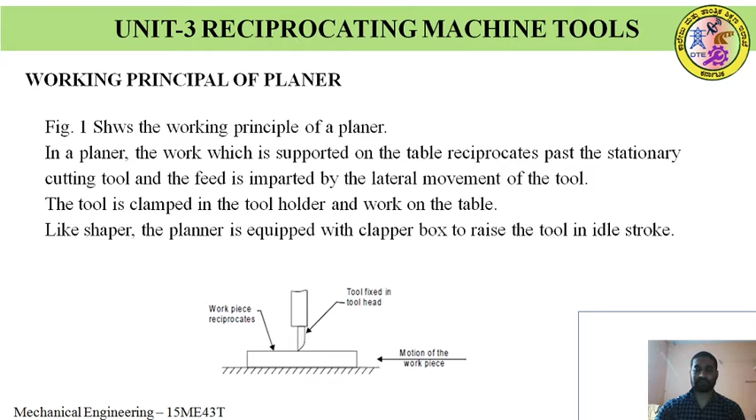The working of the double housing planer: the most common type of planer used in the market is the double housing planer. It is used to machine large castings like lathe bedways. The length of the lathe bedway is too large, along with the guideways of the lathe, and this planer is used for machining such parts.

This planer has a heavy and long bed, usually 2 to 2.5 times the length of the table, in order to accommodate the total length of the stroke. It is 2 to 2.5 times the length of the table, and it is provided with two guideways upon which the table reciprocates.

It carries the workpiece. There are two vertical housings, called columns, mounted near the middle of the bed, exactly in the middle. These two vertical housings, also known as columns, are connected by a cross beam at the top.

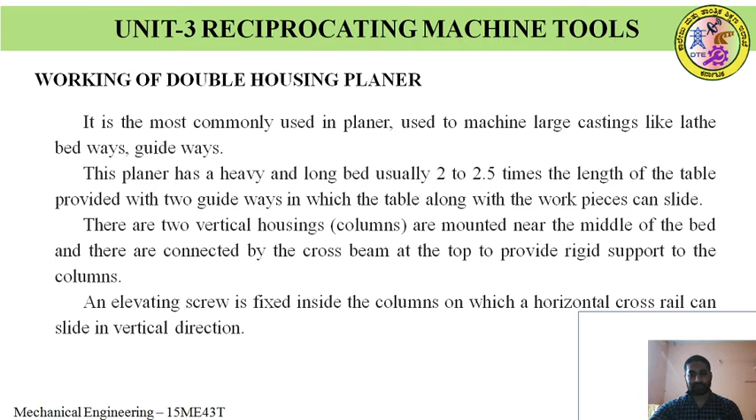There are two vertical housings mounted near the middle of the bed. An elevating screw is fixed inside the columns on which the horizontal cross rail can slide in the vertical direction. This cross rail has feed screws used to move it; it carries the movable cross rail, while another cross rail is fixed at the top.

This movable cross rail carries the tool post and the tool, which can be moved in upward and downward direction, and also in a linear direction parallel to the table, to give cross feed and downward feed. There are also two side tool heads used for different operations.

In the case of a shaper, we can accommodate only one single point cutting tool, but in the case of a planer, we can accommodate four tool heads, so that we can use it for four different operations.

The cross rail carries a vertical tool head. This vertical tool head can be fed crosswise and in the vertical direction, so crosswise feed and vertical feed can be given to the tool by means of this cross rail.

In addition to this, there are two side tool heads. These two side tool heads are mounted on the vertical housing to give feed in the horizontal and vertical direction.

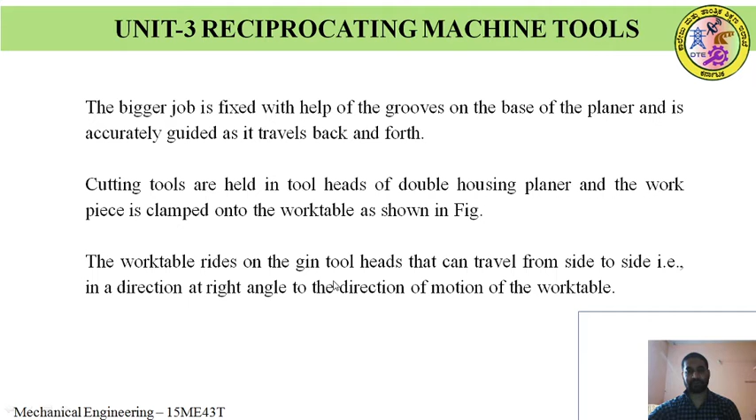The bigger job is fixed with the help of grooves on the base of the planer and is accurately guided as it travels back and forth. Cutting tools are held in tool heads of the double housing planer, and the workpiece is clamped onto the work table as shown in figure.

The tool heads can be traveled from side to side at right angle to the direction of motion of the work table. The tool heads are mounted on the horizontal cross rail, can be moved up and down by moving this cross rail, and also moved in a linear direction. It can be moved in both horizontal and vertical direction.

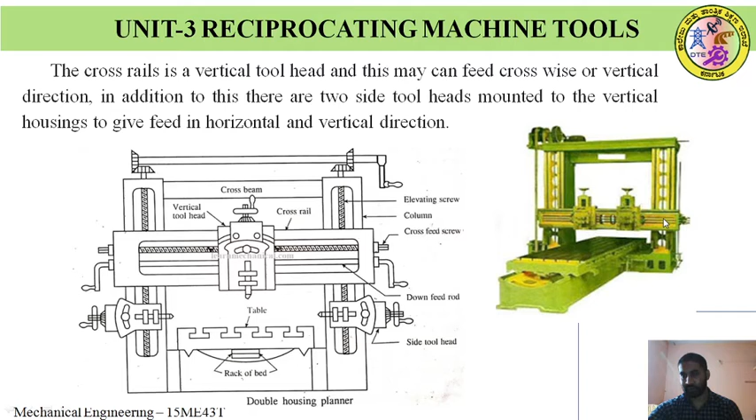The horizontal movement is by moving this tool heads from here to here. The vertical movement is applied by moving this cross rail upward and downward. Cutting is achieved by applying linear primary motion to the workpiece, and feeding the tool at right angles to this motion.

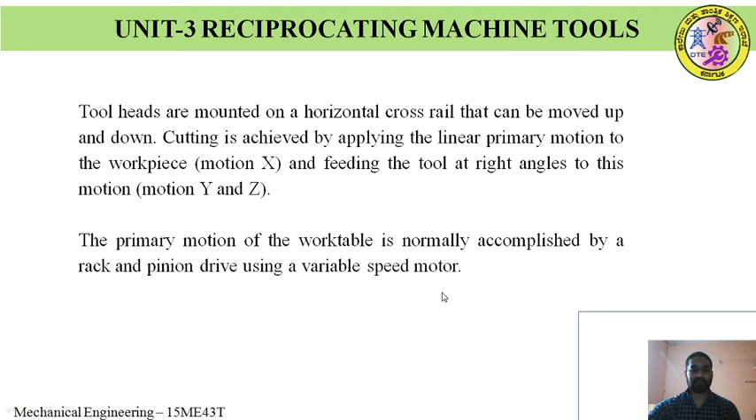The primary motion of the work table is normally accomplished by the rack and pinion drive using a variable speed motor. As with the shaper, the tool posts are mounted on the clapper box to prevent interference between tool and workpiece on the return stroke, and the feed motion is intermittent.

So a clapper block is also provided in the planer machine in order to lift the tool during the return stroke, to maintain the gap between tool and workpiece, because during the return stroke no metal cutting action takes place.

If no metal cutting action takes place, what will happen if you keep the tool as it is? During the return stroke, which is much quicker than the forward stroke, it will damage the workpiece. To avoid that, the clapper box is used to lift the tool and maintain a sufficient gap between tool and workpiece during the return stroke.

The size of the standard planer is specified by the size of the largest solid that can reciprocate under the tool. In addition, parameters such as table size, length, width, type of drive, number of speeds and feeds available, power input, weight of the machine, and floor space required are used to specify the planer completely.

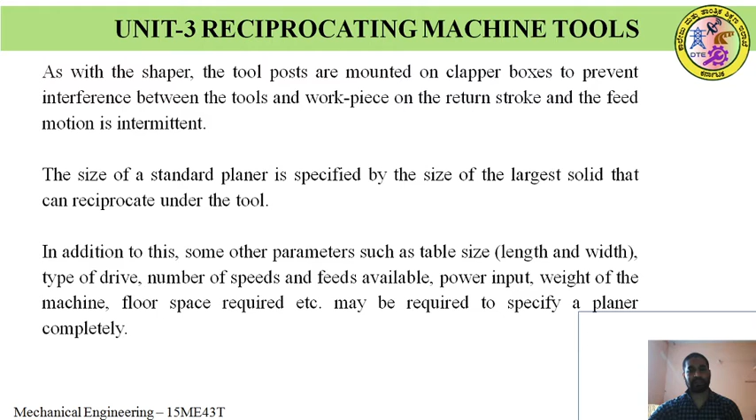The vertical distance from the tabletop to the cross rail, when the cross rail is in its topmost position. If you move this cross rail to the topmost position, then this vertical distance from the top of the table to the horizontal cross rail is also used to specify the planer machine.

The maximum length of table travel, as it reciprocates, how much length of stroke it will cover during operation, is also used to specify the planer machine. The length of the bed, you can see, is 2 to 2.5 times greater than the length of the table, and this is also used to specify the machine.

After the length of the bed, the length of the table, and the method of driving the machine - it may be pulley driven, gear driven, or crank driven - that type of drive, and the horsepower of the motor used to drive the machine, also specify the planer machine.

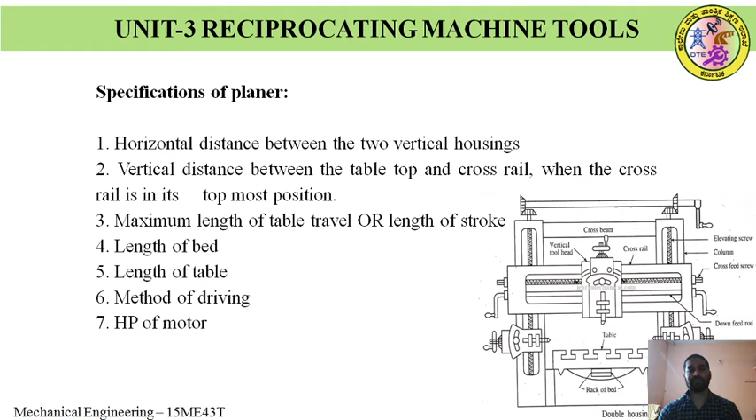Planer operation is used for machining flat horizontal surfaces, vertical flat surfaces, angular surfaces, curved surfaces, slots and grooves. The operation is very similar to the shaping operation.

The only difference here is it can accommodate larger workpieces compared to a shaper machine - larger, lengthier, and heavier workpieces. So the operations are very similar to the shaper operation.

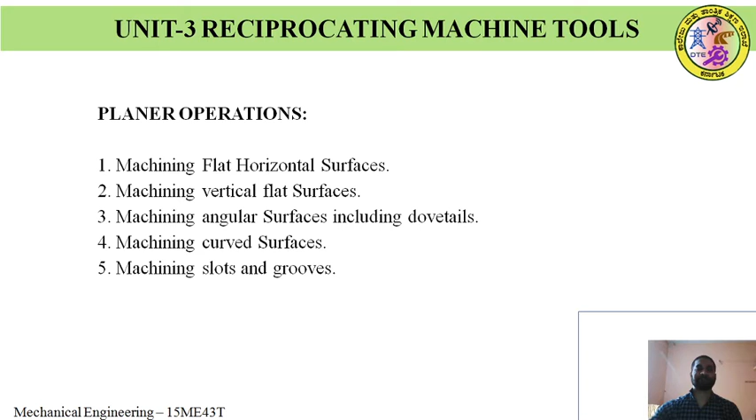Before ending this session, I will show the simple operation of a double housing planer with a short video.

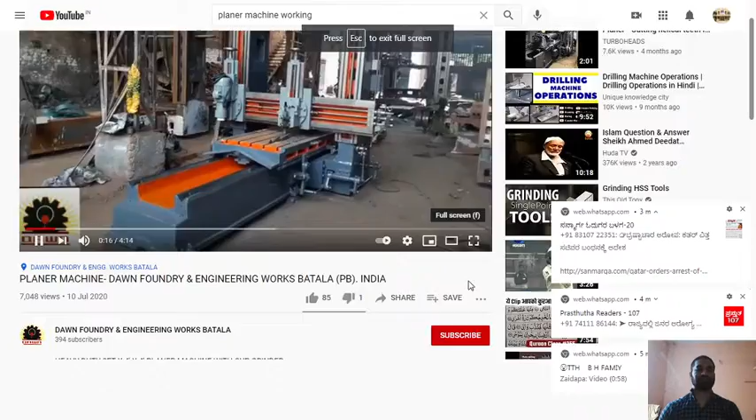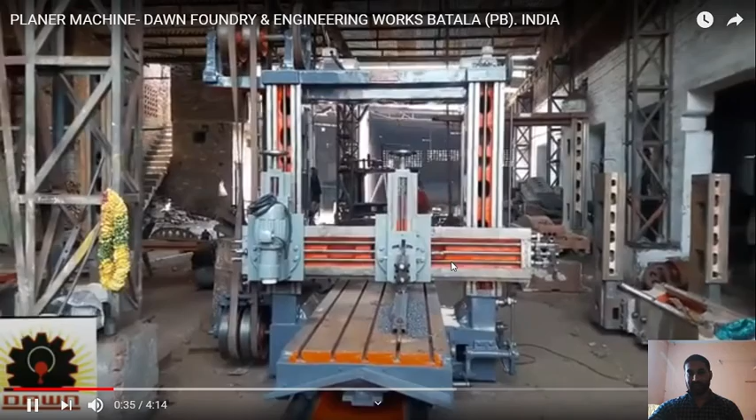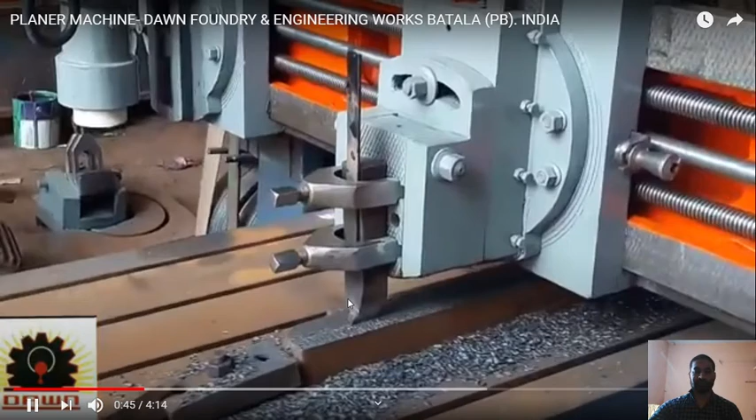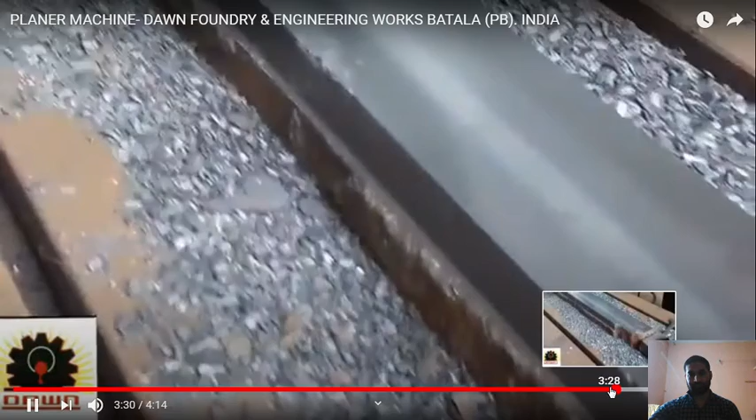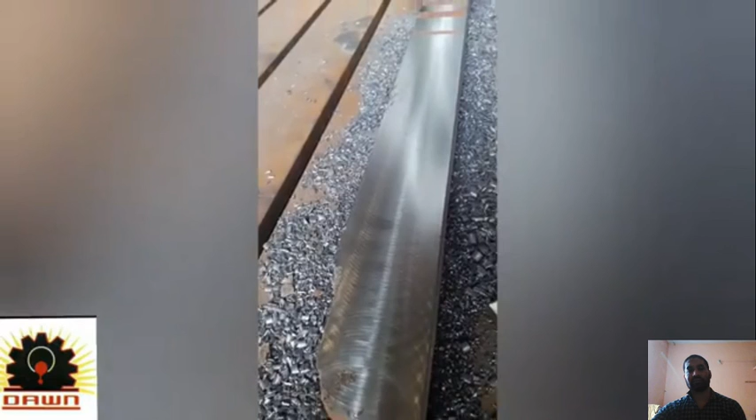In the video you can see that during the forward stroke only, sparks appear, meaning the cutting action is taking place. During the return stroke no sparks appear, meaning there is no contact between tool and workpiece. If you observe carefully, the return stroke is much quicker than the forward stroke. Thank you for watching this session.